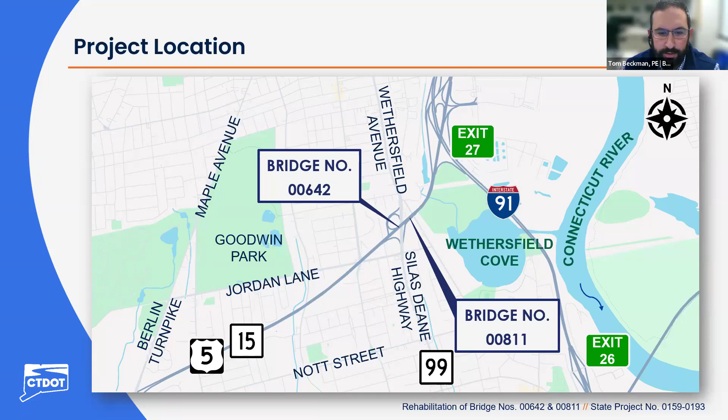During this presentation, you may hear terms that you aren't familiar with. To make things easier, we're going to introduce a few of those terms now. The substructure, which forms the foundation of the bridge, includes several important elements. First, shown in red, is the abutment. These are the end supports that connect the superstructure above to the ground. They also hold back the earth behind them, acting like bookends. Adjacent to the abutments are the wing walls. These also help retain the embankment and control grade elevations. When a bridge is too long to rely solely on the abutments, piers are added to provide additional support for the superstructure.

The superstructure, supported by the substructure, consists of elements as well. First, shown in blue, are the girders, which are beams that support the bridge deck. The bridge deck, shown in green, is the surface of the bridge, the part you're familiar with, as it's what you typically drive over. Also shown in a darker green are the parapets. These are barriers along the edge of the bridge provided for safety.

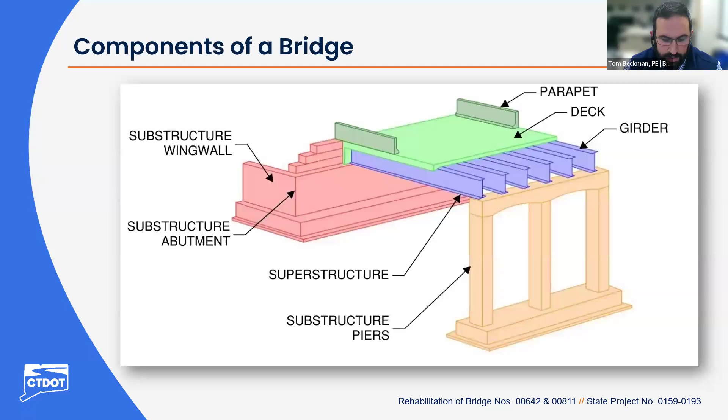Now I'm going to introduce you to the bridges. The first one here is Bridge 00642. The bridge is designated as the Clinton Hughes Memorial Bridge and was constructed in 1942 and rehabilitated in 1986. It is a 145-foot long steel multi-girder superstructure consisting of two 69-foot spans, which are supported on reinforced concrete abutments and a pier. Route 15, US Route 5, consists of 2 lanes in each direction on the bridge, with an average daily traffic of approximately 37,000 vehicles per day. Route 99 below is also 2 lanes in each direction, with an average daily traffic of approximately 16,000 vehicles per day.

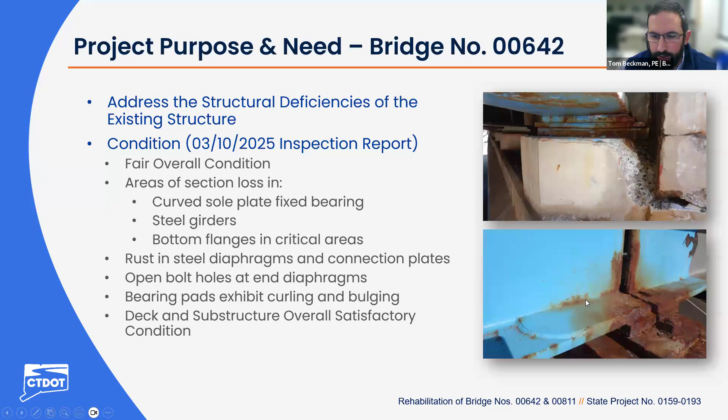And then as we go to our photo in our bottom right here, again, these are those steel girders sitting on our pier, and you can see some of the rust that is taking place on those bottom flanges as identified. All right, so with that, I am going to turn the presentation over to David Kull with McFarland Johnson, who is going to walk you through the proposed rehabilitation.

All right, thanks, Tom. So what we're going to do for this bridge is pretty standard repairs. We're on about a 40-year cycle. If you remember a couple slides ago, the bridge was rehabbed about 40 years ago. So it's about time to come back out here and do some more repairs.

Taking a look from the bridge from an aerial view, the first thing we're going to do is try and keep the water from leaking down to the bridge. So we're going to be replacing the joints that are at the ends of both bridges, highlighted there in blue. We're going to go with a little bit more of a modern repair, to try and get the joint off the end of the bridge so the water doesn't have the opportunity to leak down onto the steel down below.

We're also going to be, as we work our way out from the joints, performing concrete deck repairs. That's what you basically drive on. We're going to be doing full depth and partial depth repairs to locations that will be determined as we do an inspection.

When we get out to the middle of the bridge, there is a joint in the middle right now. We are going to be eliminating that. We're going to be pouring a solid concrete deck, or what we call a link slab, over that joint. So we're actually eliminating one of the joints on the bridge that has potential to leak and cause water and future rust or future damage to the bridge.

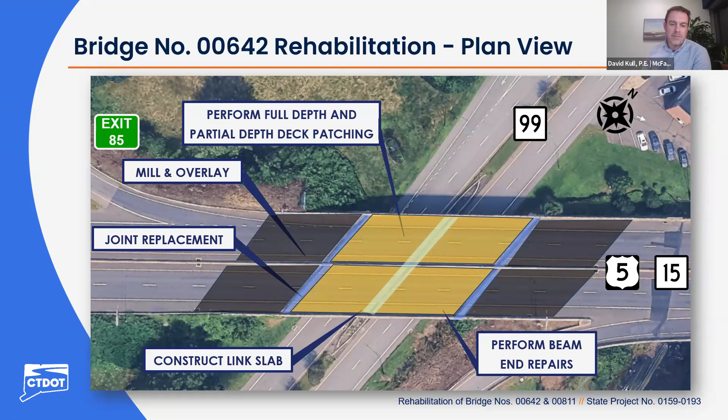Those bearings that were partially unsupported and bulging — we're going to be temporarily supporting the beams, taking out those old bearings and putting in new bearings. One of the bigger things we're going to be doing for this project is we're actually going to be knocking off all of the paint on the bridge, and we're going to be what we call metallizing. It's like a new and better form of protection for the beams, where we don't put paint, but we actually bond some metal to the bridge — a high performance coating.

We're also going to be performing some beam end repairs out there at the piers that we had shown some pictures of earlier, getting rid of that rust, keeping the beams in service as long as we can. And as we follow the water down, we're going to be performing the substructure repairs, or repairs to the abutments, knocking off all of that bad concrete and pouring new concrete where it's needed.

Now, what does this look like when you're driving across the bridge? Let's move on to the next slide.

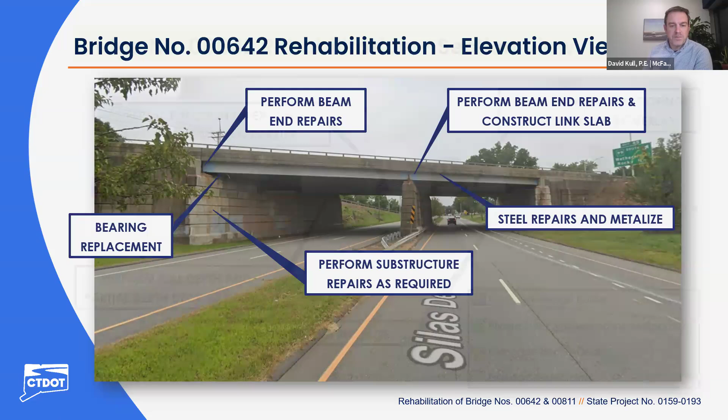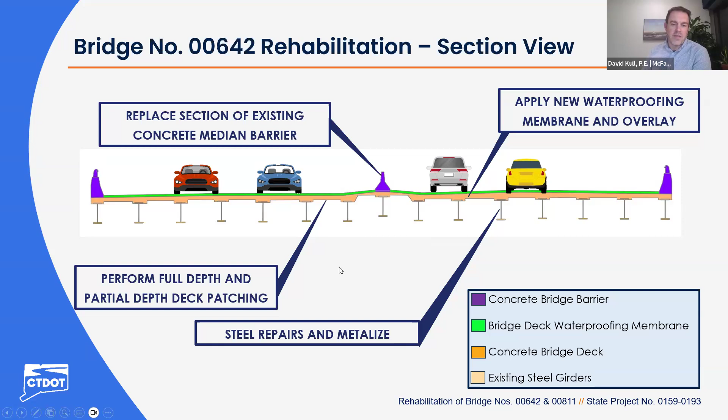Here it is in section view. New wearing surface in green right there. We are going to be putting in a portion of a new concrete median barrier. That's when we do the link slab. We'll have to replace a portion of that median barrier over top of that joint we're eliminating, so we'll have a new barrier out there. Like we said before, beams will be rehabilitated and metallized, and the deck will have full and partial depth concrete repairs, so we'll have a nice, good riding surface as we go across the bridge.

So we go on to the next bridge. I'll let Dave send it back over to Tom to talk about Bridge 811. All right, thank you, Dave.

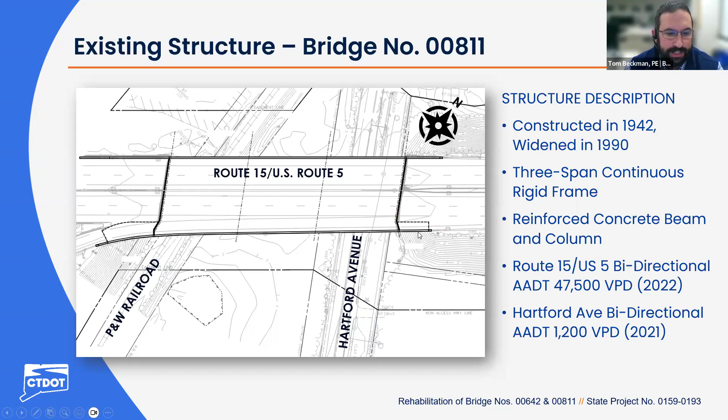So Bridge 811, similar to 0642, was constructed in 1942. It is a 308-foot long, 3-span continuous steel rigid frame bridge, supported on steel columns on concrete footings. When the bridge was widened in 1990, this was done to improve the acceleration lane from Route 99. A couple of additional spans were added, consisting of reinforced concrete beams and columns.

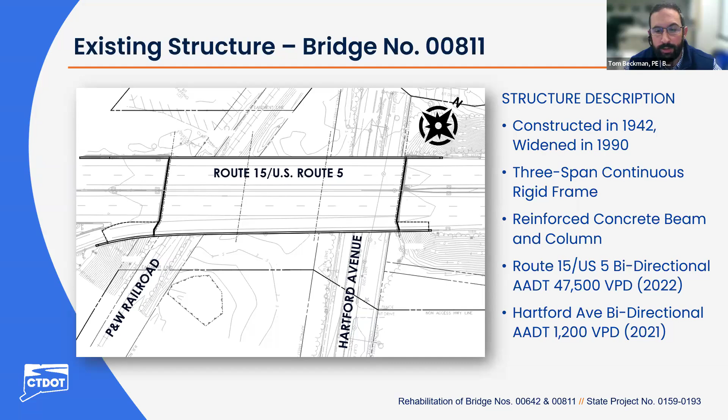Route 15, US Route 5 in this location consists again of 2 lanes in each direction, but we do have the additional acceleration lane in the northbound direction with an average daily traffic of approximately 47,500 vehicles per day. And Hartford Ave below consists of 1 lane in each direction, with approximately 1,200 vehicles traveling on it each day.

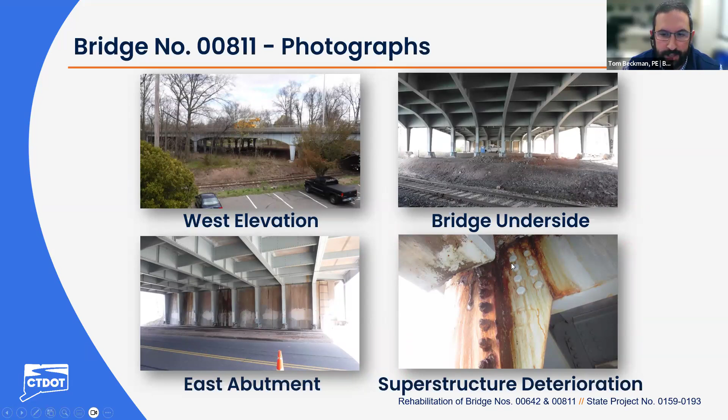Bottom left photo is showing that east abutment. Again, we still have those steel columns supporting the structure with Hartford Ave in the foreground. Bottom right photo is just hitting on some of the drainage and leaking happening at the joints, and this is some of the rust that is on the steel structure.

Our purpose and need for Bridge 811, similarly, is to address the structural deficiencies of the existing structure. As of the April 23rd, 2024 inspection report, it is in poor overall condition. The steel superstructure is deteriorated, being the frame, girders, legs, and diaphragms. There is section loss up to 25% in critical locations, and there are missing anchor bolts and nuts. The deck and substructure are in overall satisfactory condition, but the concrete is exhibiting random cracking, spalling, and honeycombing.

So again, we're going to hit a couple of our photos of the bridge to look at some of the conditions. This top right photo is one of those steel columns sitting on the footings, so you can see some water ponding here below. Dave's going to hit on that coming up, but you can see the rust taking place here affecting that condition. You can see our missing anchor bolt in this one location. Then the bottom right photo is just showing a typical steel condition, so you can kind of see that pitting happening here.

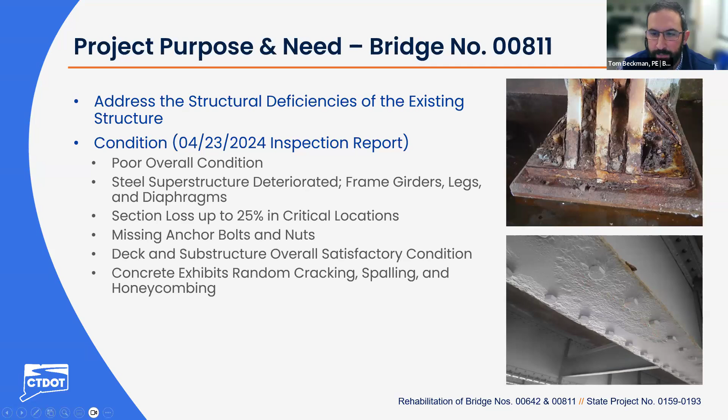And with that, I'm going to turn it back over to Dave, who's going to go through the rehabilitation of 811. Thanks, Tom. So for this bridge, pretty much the same as Bridge 642, trying to keep the water off the bridge. Because this bridge is a little bit longer, we're going to be doing a little bit more extensive repairs from the top side. We're going to be doing full depth and partial depth deck patching as required. We're going to be doing an inspection soon, identifying locations that need to be repaired, so we'll be performing concrete deck repairs. When we get towards the end of the bridge, we're going to be doing some deck end reconstruction.

Because of the longer span, it's going to be a little more involved of a deck end construction, trying to get that joint off the end of the bridge and move it behind so it's not leaking down to the steel as it currently is.

Another thing we're doing with this deck end reconstruction is putting in a new approach slab. You don't really notice approach slabs when driving, but they help provide a smooth riding surface when going from that flexible roadway onto longer bridges.

Because we're going to be digging up a portion of the roadway, we are also going to be doing a mill and overlay. Once we're all said and done, that'll give a nice smooth riding surface so you won't even notice it when driving across the bridge.

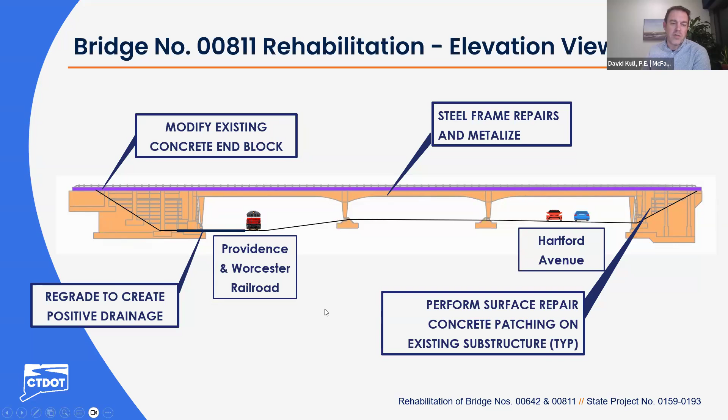Also, next to the Providence Worcester Railroad, we do have some water ponding occurring, which is causing a lot of the damage and deterioration out there now. We are going to be regrading that area to get positive drainage, so we can move the water away from the bridge and not have to come back out here in the future.

What does this look like in section view? It's pretty similar to what we had for Bridge 642 — concrete repairs to the bridge deck, new wearing surface, and similarly we'll be doing repairs at the ends of the bridge. We are going to be putting a new median barrier in out there as well.

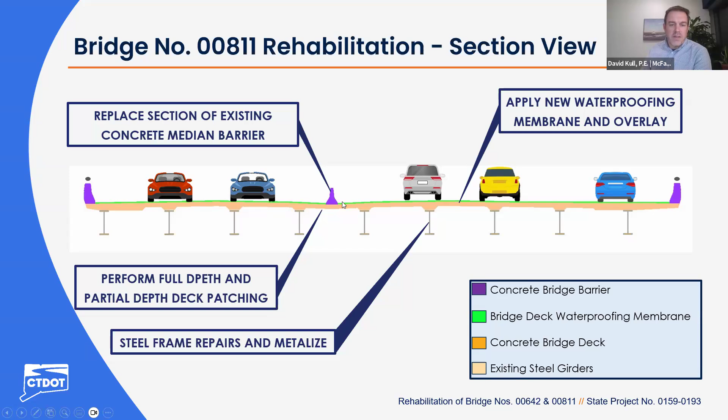So if we move to the next slide, one of the biggest challenges with this bridge is how do we perform all these repairs while we try and keep traffic moving? I'm going to turn this over to Gene, who's going to walk through how we're going to go about doing that. Great, thanks, Dave.

So as Dave said, in order to allow for the bridge repairs and rehabilitation, we have to manage the traffic both on Route 5 and 15, but also on Route 99 and Hartford Avenue below. I'm going to show you some plan views here — some overall views like this. What you'll see is there will be 3 overall stages of construction, so the rehabilitation will happen in 3 different stages. What we're showing on these plans is the area in that orange shading — that's where the actual construction will take place, and there will be some modifications to the traffic above and below.

Right off the bat, Hartford Avenue will be closed for the length of this construction. Trying to maintain traffic underneath while we're doing this rehab was going to be too difficult, so we are going to close Hartford Avenue and provide a detour. I will show that detour — that'll be my last slide.

So the way this construction is going to proceed is for stage 1, traffic on northbound Route 5 and 15 will not change.

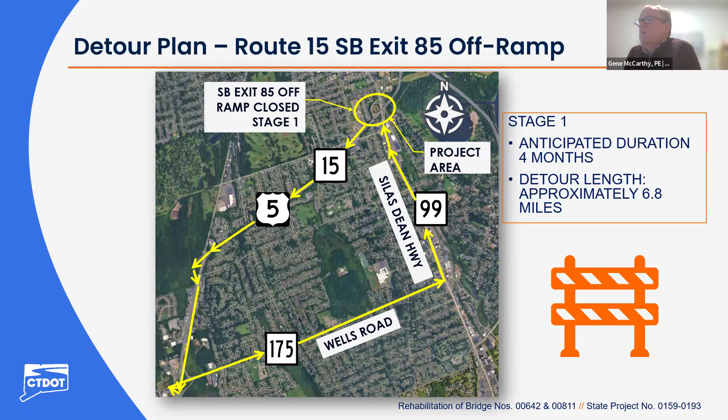As we move to stage 2, the construction and rehab will occur in the middle of both of these bridges, and the 2 directions of Route 5 and 15 will go around that center area. What will happen for both directions, however, is traffic will be reduced from 2 lanes to 1 lane for both northbound and southbound traffic on Route 5 and 15.

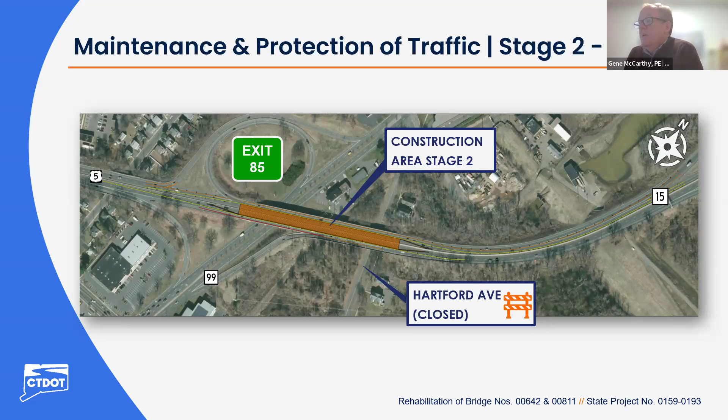If we show the next zoomed in view of the area, you'll see that larger temporary work area, the concrete barrier protecting that construction area, and then the single lane of traffic in both directions of 5 and 15. We will reopen that southbound off-ramp during stage 2. We're estimating this stage will take approximately 6 months.

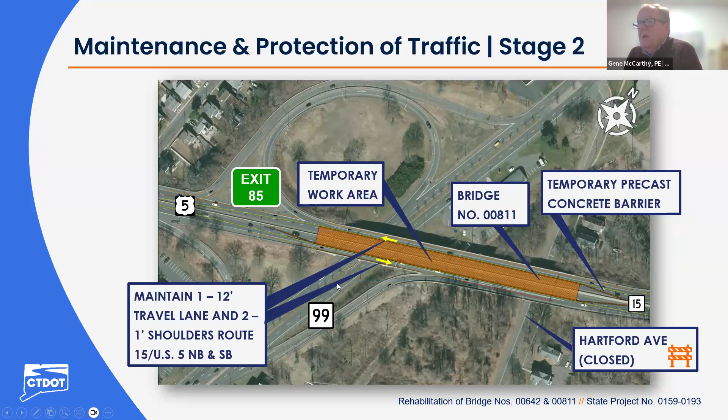When we move to the overall for stage 3, the southbound traffic will be restored to its permanent location with 2 lanes, and then we'll finish the east portion of the rehabilitation. That will also require that we close both of the northbound ramps - the northbound off-ramp to Route 99 and the on-ramp from Route 99 to Route 5 and 15.

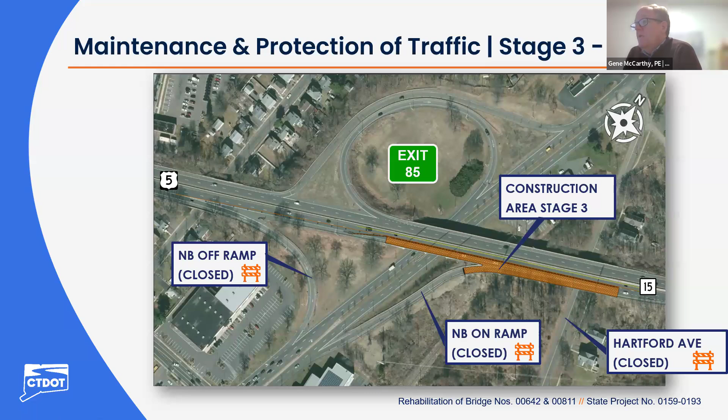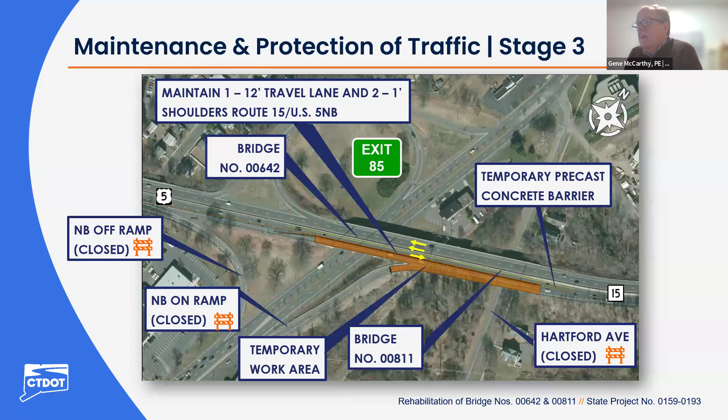When you zoom in, you'll again see that traffic on northbound Route 5 and 15 will remain at a single lane, and you'll see that we'll be doing the rehabilitation of the bridges and that on-ramp.

So these 2 detours - for the off-ramp, you would be directed to stay on Route 5/15 all the way to Interstate 91, head south on 91 to Route 3, and that will get you back to Route 99. That's about a 5.4 mile detour, and we're envisioning stage 3 to run about 4 months.

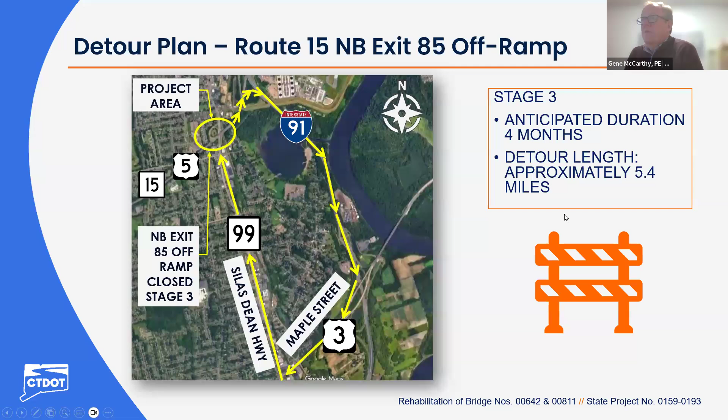Then for the on-ramp, that traffic will be directed to stay on Route 99, go further north to Airport Road, over to Brainard Road, and then you can use that ramp to access Route 15 and 5 again. Again, this is about a 4-month stage, and that detour is about 2 miles in length.

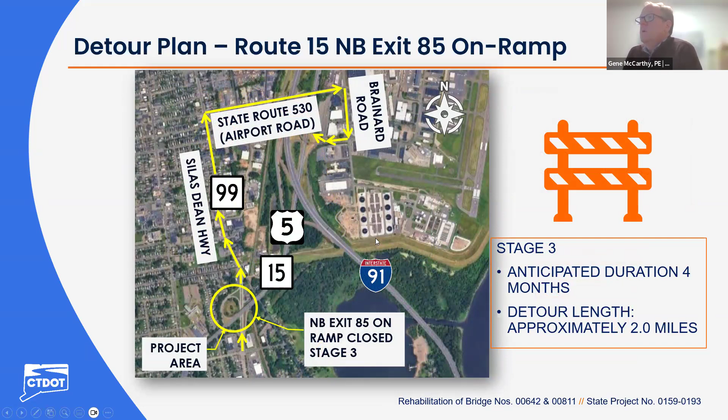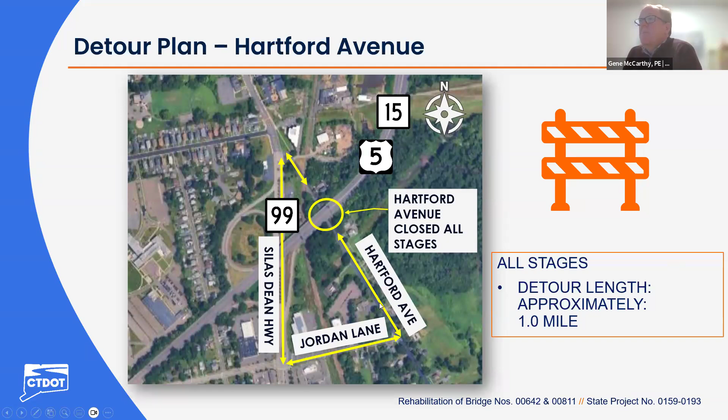So the final slide to show you is for Hartford Avenue. This will intend to close that during all 3 stages of this construction. We would utilize Route 99 and Jordan Lane, and that overall detour would be about 1 mile in length. And with that, I'll turn it back over to Tom.

Thank you, Gene. Going to touch on a few more items here. First being utilities - just to highlight that while there are many aerial and underground utilities in the project area, the only one anticipated to have impacts is Coxcom, which is running below Bridge 00811. That is anticipated to be supported in place during construction, so should not have any impacts on service.

Touching on our permitting, there would be one permit required for the project, which is the Connecticut Department of Energy and Environmental Protection Stormwater Discharge Permit. The project will have ongoing coordination with the State Historic Preservation Office, as well as the Tribal Historic Preservation Office. No right-of-way impacts, easements, takes, etc., are anticipated for the project. And then due to the railroad, flagging and protection of those services are required and anticipated.

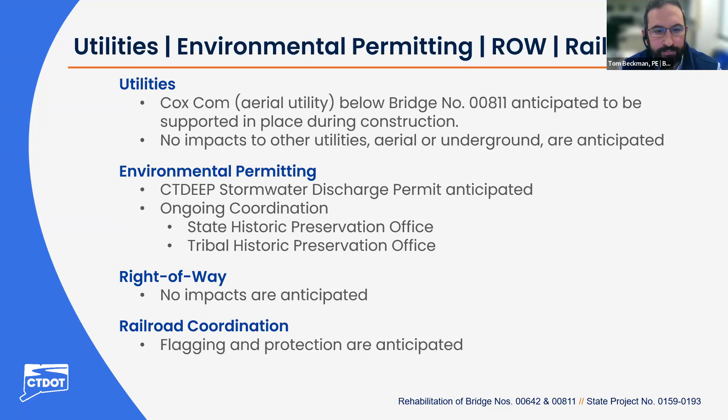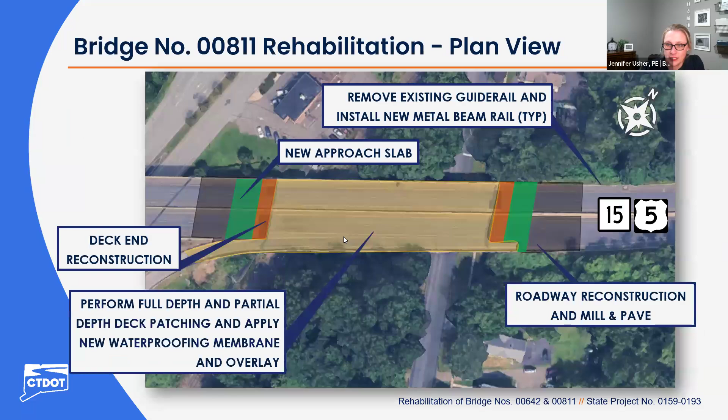Another question from Ryan Biggs. Really great question. There is an additional bridge a few feet away from these locations. Is that on target as well for updates and upgrades? Perhaps we could take a second to bring up a Google map to make sure we're referring to the correct bridge. Because Ryan, I believe that bridge is actually being looked at right now for potential rehabilitation and or replacement. Tom, if you can, I'm sorry I'm forgetting the name of the road it goes over, is it McMullen I'm thinking of? I'm assuming that it's... McMullen, oh excuse me, fantastic, this location, McMullen Bridge. Oh, and Ryan just confirmed 00810 for us. Thank you, Ryan. Okay, perfect, we're all on the same page then, make sure it's McMullen.

So I'll take a stab at answering that myself, and then I may defer back to Tom Beckman to add a bit more detail. Interestingly enough, that project was recently assigned to BL Companies to serve as the consultant liaison engineer, and we are in the process of reviewing that. The process really starts with us looking at the existing structure, identifying the need for improvement and or replacement, as well as a host of other things including environmental reviews, utility relocations, everything that may come into play. What we'll do is actually look at that, then develop a report, they call it a rehabilitation study report. That will consist of 3 to 4 different alternatives that we present to the DOT as possible options to either replace or rehabilitate it. We'll weigh the different pros and cons for each of those alternatives, and then they'll decide what the best scope is and move forward.

So that will not be part of this project. But as Tom mentioned, with some other improvements for pedestrians, this is also coming down the pike. So it's definitely a location, bridge and structure that's been identified as certainly needing some upgrades at the very least. I believe the town had actually reached out to us earlier noting that, so it's been kind of on everyone's radar. Hopefully that answers your question. I don't know if there's anything else, Tom, you want to add that I may have neglected to mention. No, you did a fantastic job answering that. Thank you, okay, all right.